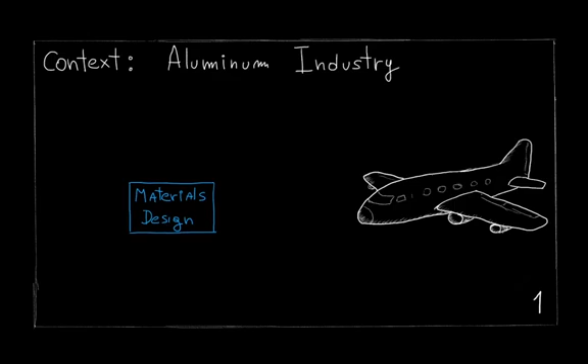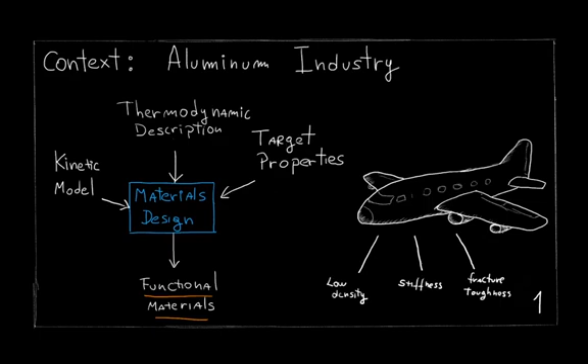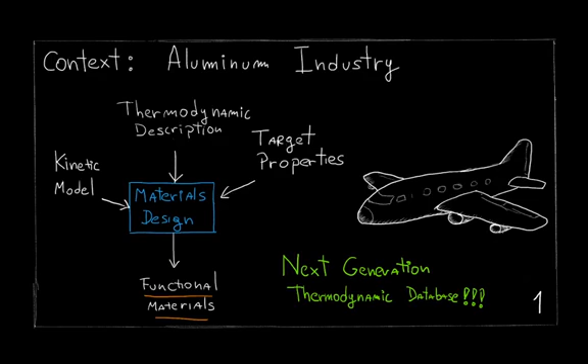Material design is a key strategy in the aluminum industry where, for a given set of target properties and the right models, it gives way to the creation of functional materials. Here, it's of great importance to have a good and accurate understanding of the thermodynamics of materials. That's why our team is working on the development of the next generation thermodynamic database, where experimental data is complemented with atomistic simulations for compounds and solutions, modeling stable but also metastable phases for a precise description of the Gibbs free energy.

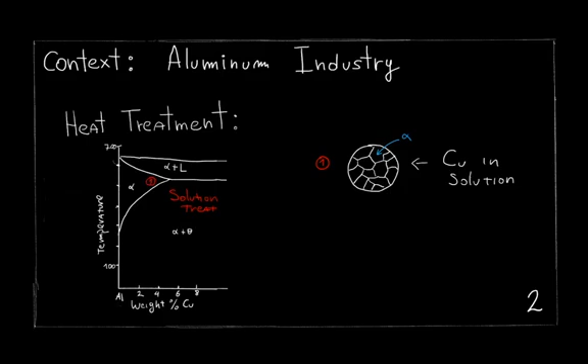We know that for heat treatment, we dissolve the alloying elements heating slightly above the solvus, and then, during quenching, metastable phases will form and make way for the precipitation of equilibrium phases by aging. This will determine the final microstructure and therefore the physical properties of the alloy.

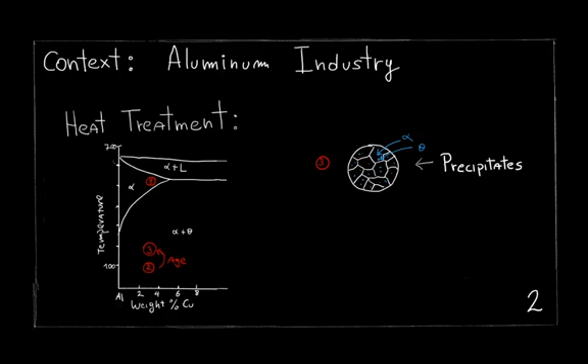It is important then that we consider not only the stable phases but also the metastable ones in order to have a proper description. The problem for metastable phases and CALPHAD approaches is that you need data, which is hard to find experimentally for metastable phases. So, in order to complement data that exist and thus have a complete description of those intermetallics of interest, we need to use numerical calorimetry.

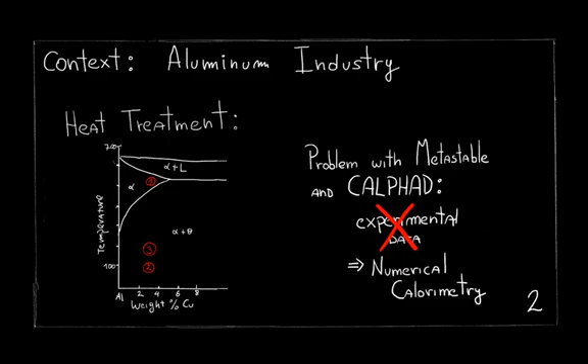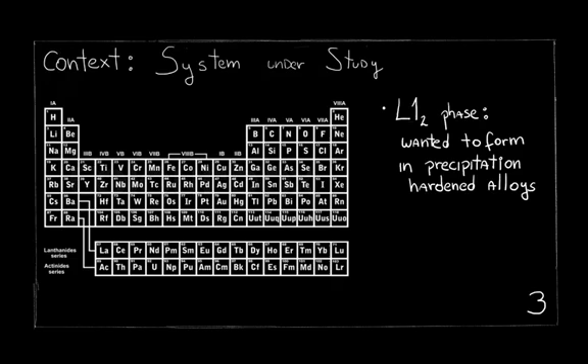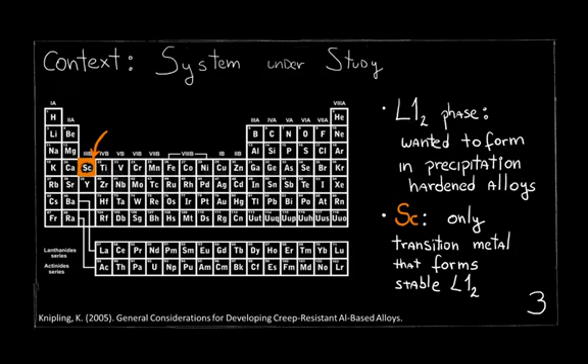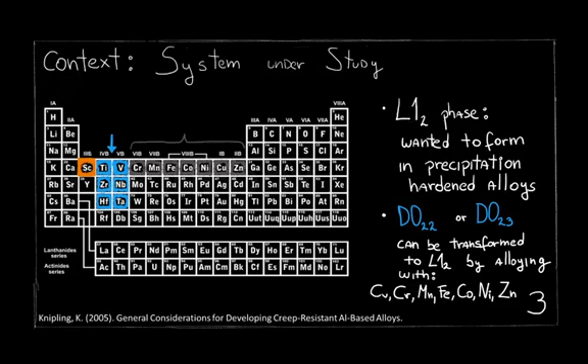Then, in the context of this project, our objectives are to fill the gap of data that exists for metastable D022, D023, and L12 phases of the compound Al3X, where the X are the elements here listed, to finally apply this to the computation of accurate solubility limits.

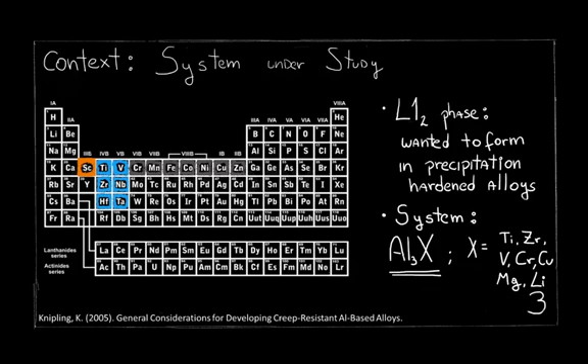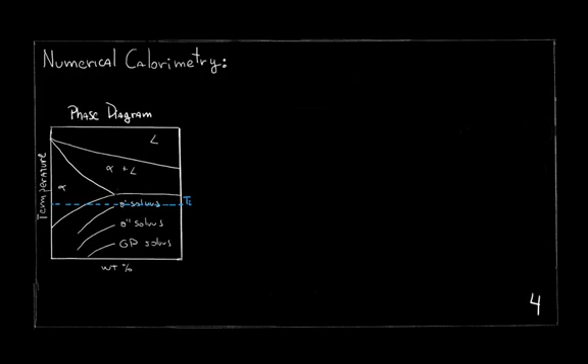For industrial applications, it is of relevance to have an accurate description of the phase stability. This is done by computing at each temperature the Gibbs free energy as a function of composition. This Gibbs energy and its different contributions can be obtained by using different methods.

There are several models that describe the internal energy, some of them more suited than others for this kind of metallic systems, like the tight binding in the second moment approximation. Some others can incorporate explicitly the internal crystalline structure, like the Morse potential.

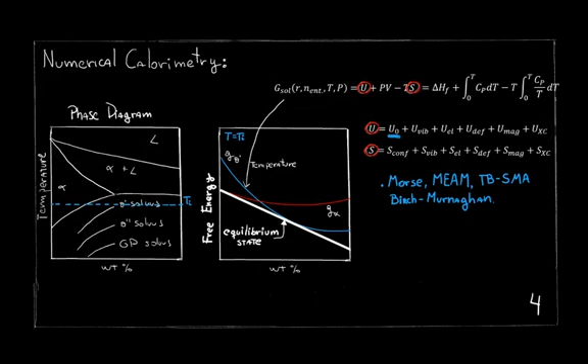For the vibrational part, which is a big contributor to the free energy, it can be computed using the quasi-harmonic approximation, the Debye approximation, or by a new, more accurate and self-consistent approximation that we are now in the process of developing.

You have to note that a little deviation in the Gibbs energy of a phase could lead to huge errors in the prediction of the solvus. For example, a couple of hundred joules could cause problems when determining the phase stability. That's why it's so important to have an accurate description.

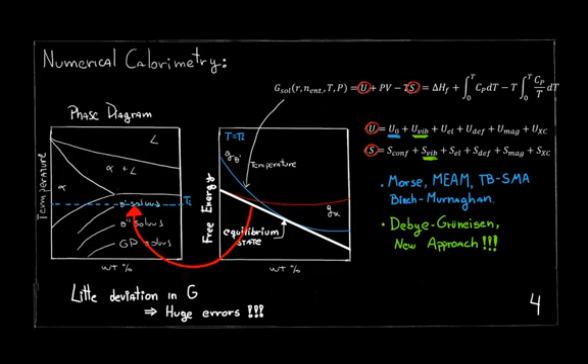The new approach for the vibrational contribution is an extension of the Debye approximation. It is formulated in such a way that all thermodynamic properties are derived directly from the free energy without losing self-consistency. So no self-consistent loops are required, no empirical approximations to the heat capacity or the Grüneisen parameter are used, and one interesting property it also has is that a description of the intrinsic anharmonicity can also be included.

Also, it's a very fast and simple way to calculate accurate thermodynamic properties that can be integrated later with FactSage to complement what's already there.

Here are some results of the application of this methodology. These are results for the heat capacity and thermal expansion I calculated for elements and compounds. Elements are compared with experimental data with reasonable accuracy. For the compounds, there are no experimental data available. This is being integrated into a FactSage database for heat-treatable aluminum alloys.

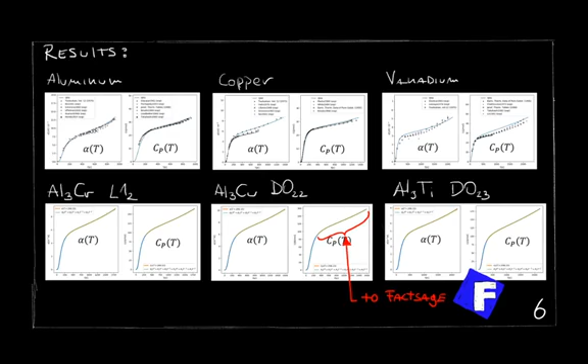I mentioned that all thermodynamic properties are obtained from the free energy. Here, the internal energy plays an important part. We are working on extending the methodology to take into account the atom positions and the internal interactions inside the structure to describe the energetics of compounds.

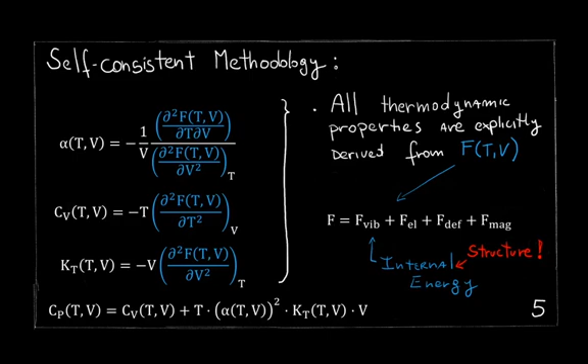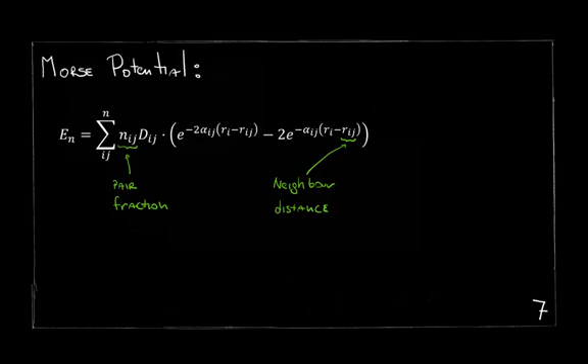We have implemented the Morse potential that uses internal structure information to calculate the internal energy. This information can be calculated for a given structure through a pair analysis. We are working now on the prediction of the internal energy of compounds by training the unary and binary interactions to be able to perform calculations fast and without the need of complex calculations like density functional theory.

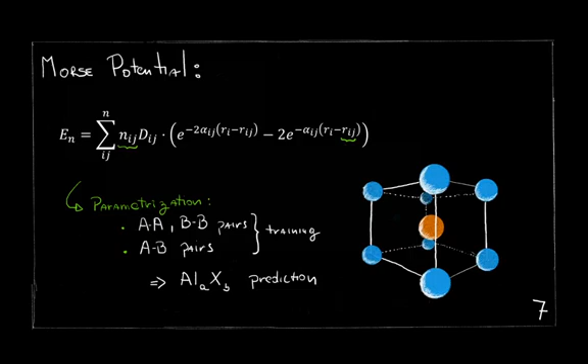As it was previously mentioned, we have implemented a set of tools that will allow us to generate structures, run pair analysis, and also predict thermodynamic properties. This was already implemented, and now we can calculate reasonably accurate thermodynamic properties for unary systems and binaries, but also we can now predict the heat capacity for compounds without using density functional theory, which is a huge improvement to our methodology, since now we no longer require extensive time-consuming calculations to have equally accurate results.

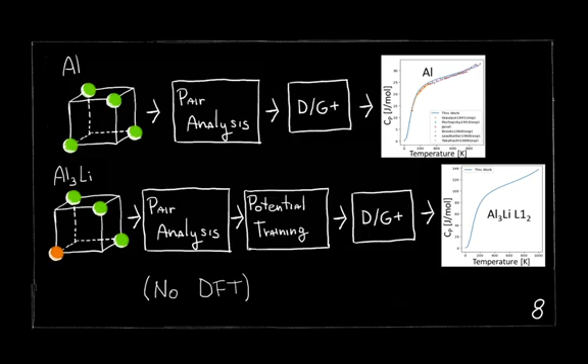This concludes this presentation about our work in the computational thermodynamic representation for heat-treatable aluminum alloys.